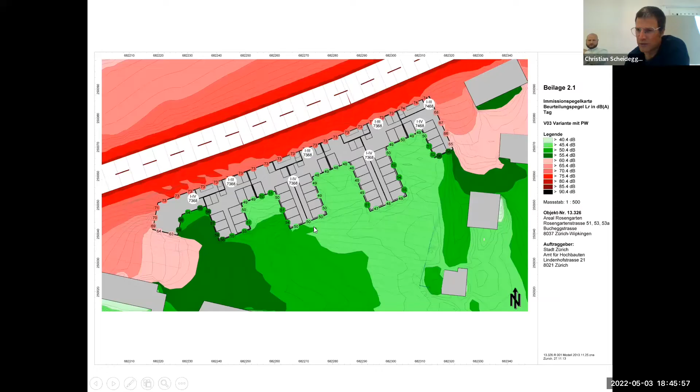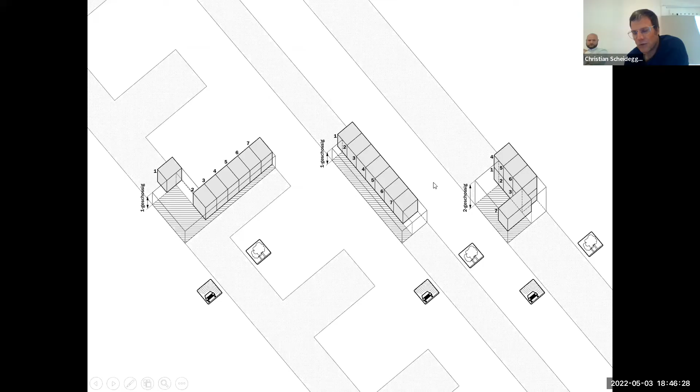Another scheme you see here, you just have an array of individual rooms towards the park, and then a living room towards the street where you ventilate this way. It's a problem, you get a really stretched living room, which we also don't like so much.

So we decided in a way to stack the rooms on top of each other. And the interesting thing is suddenly you don't have a corridor, you get a gallery, and instead of having one long space, you get a double high space here.

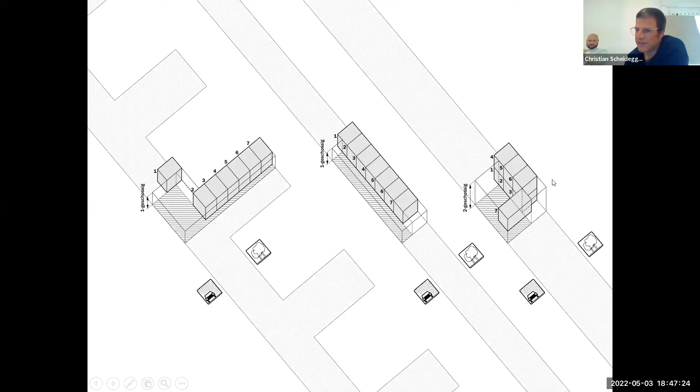And then there's a certain trick we're doing: we're shifting room number 7 towards the street and ventilating towards the park. So you get another double high space here, and all rooms can get ventilated towards the park. So this is in a way the logic of the apartments in the student house.

You see it here, drawn a little bit more precisely, what I explained already. So it's a maisonette type on the ground floor, and on top of it, we stacked just the same type again. So you have two maisonette types on top of each other with exactly the same floor plan, but different in section. Because of the building law, there's a limit of 3 floors, and then you need to build a roof or an attic.

So we decided to design an attic, a pitched roof, because the interesting thing on a pitched roof is, as I said, that you have exactly the same plan as in the apartment below. So there's in a way no structural exception. The only difference is that the space gets the vertical element here, gets almost 10 meters high, in the rooms around 7 meters, and close to the facade, the space is getting low.

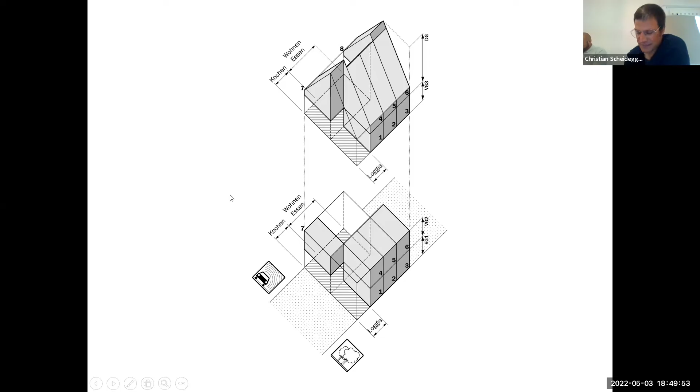So you see the cross section. I think it's interesting, as we designed the house, not only to think in plan, but especially to think in section, because here the plan is almost a rigid grid. I will show it later on, but the spatial freedom is completely in the section. And even with the same plans, you already recognize that the spaces are completely different from the apartment on the ground level to the one under the roof.

For example, here you have a normal room, then here you have one with a dormer. We have some special rooms with what we call a snorkel. I don't know if it's correct in English. So you get quite a huge variety of spaces, even though it's quite a rigid spatial system.

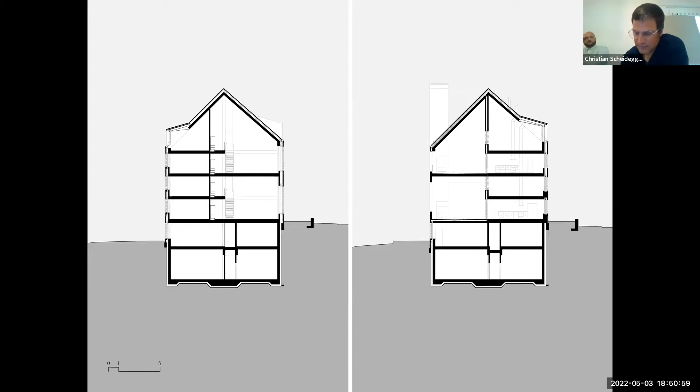I think what is interesting about student housing is that the student room is very private. It's like an apartment inside an apartment. And then, of course, the communal space becomes important because it's where all the students meet. In the family, it's the living room. But here there are 7 to 8 people, so they also need a space related to the amount of people, which has a certain generosity.

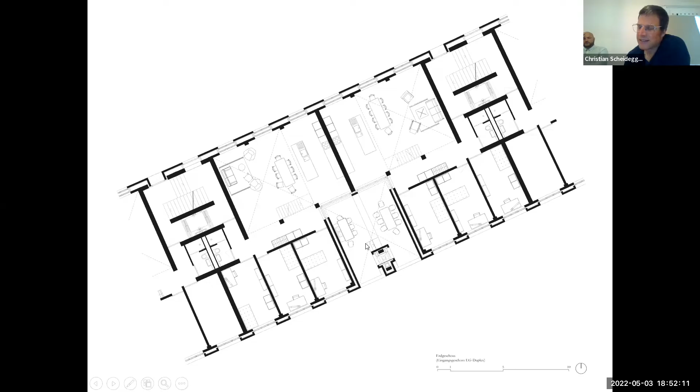And the key, I would say, of the project, or what makes it unique, is the loggia. You see it here. The loggia is like a space 2 apartments share with each other. So while sharing, this space gets doubled in size. And I think it's something interesting, especially in student housing, that it makes it possible to share spaces, because the private room is not the apartment, it's the individual room.

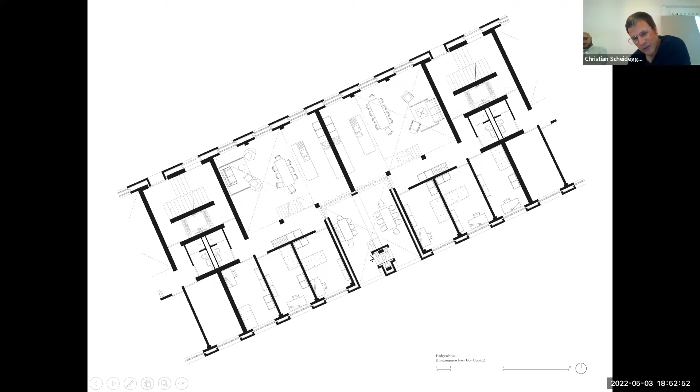So for us, this was a key moment in the competition as we broke down the firewall here, connecting these two apartments through the loggia. The loggia is also, let's say, the lung of the house, because the living room here and the kitchen are ventilated to the loggia, and the room over the kitchen is also ventilated to the loggia again. So the loggia is the room that makes this typology work. And of course, it's a huge space 16 students can share.

We also place the chimney here, on one hand to cover the single column, but also to place an element that underlines this idea of communal space where two apartments share with each other. I'll show you some pictures from one apartment, and you see that it's just an enormous space for the students.

And it's important to understand that, for example, here, you cannot build additional rooms because the rooms would be towards the street, and it doesn't work because of the noise. So always when you have a busy street, you get in a way a lack of program on the noisy side.

It also shows you slightly different phases between communal space and the private space. For example, here, when you get out of your room, you're below the gallery. You have a column, you have a stair, and this creates a buffer between your private room and the living hall here. I think it's quite important that you don't just open a door and you're suddenly inside the living room. So you need to deal with these different zones.

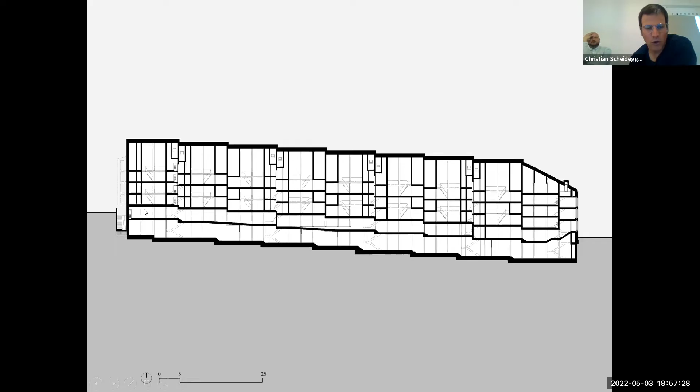So, as you recognize, we designed the student house quite bottom up, starting from knowing what we don't want urbanistically, but then thinking about the apartment and designing the house bottom up from the single house to the whole building. So you see here quite clearly the structure where the two apartments are stacked on top of each other. And then you have an array of the same apartment, with an exception at the end and at the beginning of the building.

I think it gets clear here with the rooms towards the park, and then always the living halls to the street and the loggia here, with some exceptions at the head and at the end of the building.

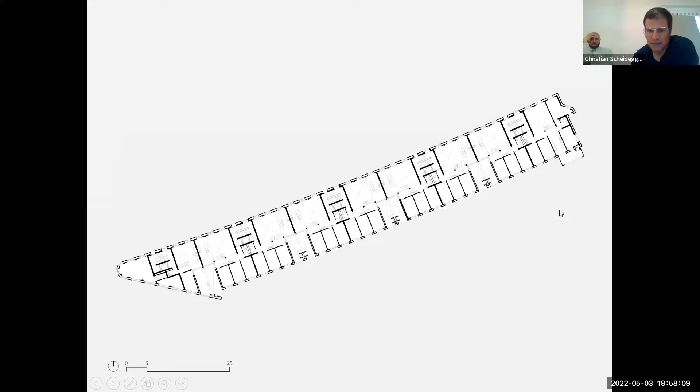This is the structure of the building. It's in a way just a simple column-slab structure, but it makes it easy to react to the topography and also to the double-height spaces. You also see the grid depends on the single room. It's a grid of roughly 3 by 7 meters. The whole building follows the street exactly, so it has a curve with a radius of 1,000 meters. So it always stretches to the park.

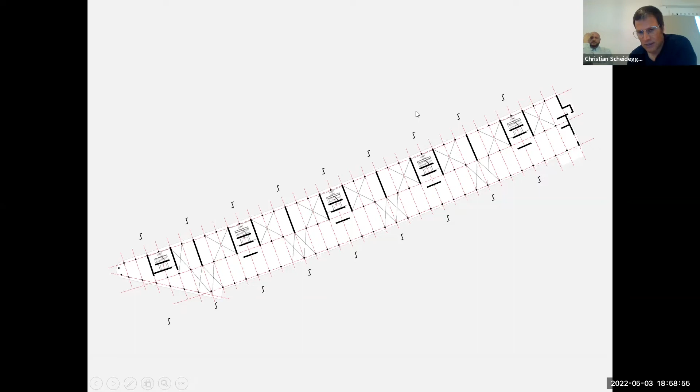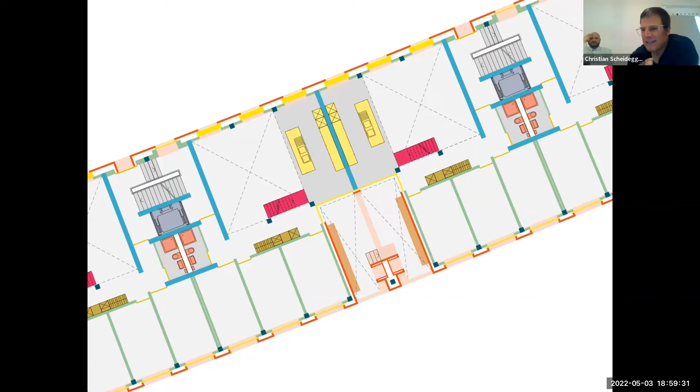This structure is built in concrete, and all elements are just added to it. And they are added like autonomous objects. So for example, the wall is always kind of freestanding. We don't build a corner from the wall. So it's like an addition of elements. In a way, you can see the concrete structure as orchestrating all the other elements.

This leads to these quite dense joints, as you see here, constructively but also spatially. Here you have the loggia and here you have the hall. This is the column that separates these two double-height spaces. And the window, the door, everything is just roughly joining.

Here's another example, just adding these elements over here. You also see, for example, in this corner, where the next apartment is coming. So you always feel small steps of 70 centimeters from one apartment to the other one.

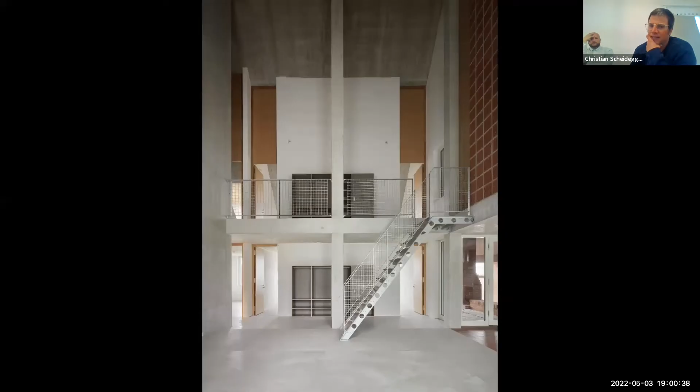And this makes the space live in a way from these different elements. We also have like a critical mass for this kind of bricolage, because we have a stair, we have here a wall for the acoustics. You see, for example, here the door, which is the whole height of the room, so that we don't need to build corners with the brick wall here. And it gets a certain density of different materials and different elements which go quite well together with the furniture from the students and the life in there.

There are some other pictures, and you see it gets quite dense. Before we saw this corner here, you get these dense joints, but on the other hand, you get these huge surfaces which, also in detail, make this apartment so generous.